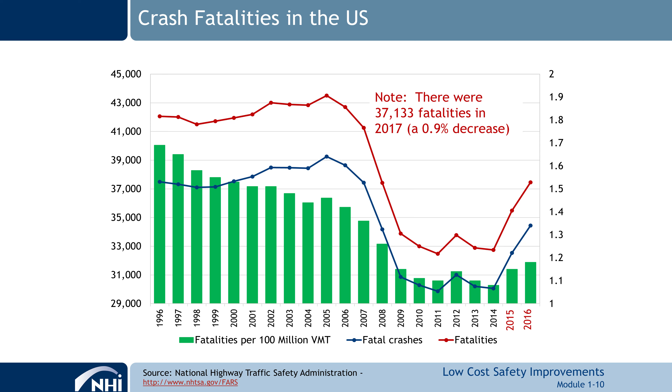This is fatalities. This is what we added, so you see it's in red here. So with the data, we just updated it. And remember, I can provide you these PDFs if you want. And you can see what's happened in the last couple of years. And here's what's happened in 2017. We're about doing this, right? Something along that. So positives? What do you see positive here?

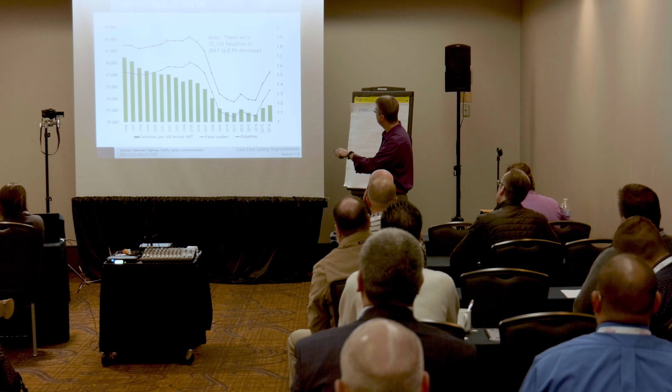Downward trend. I mean, this is all the way up to 2006 here. Our economy was doing well when that was all happening. And then what else? Again, I remember these times. Here's your rate. This is fatalities per 100 million VMT. So we had a 5 and 8% increase between 2014 and 2016, and about 1% last year.

Anybody here deal with crash data? And you're going to get my opinions. What happens with crash data? It goes up and down. It goes up and down, people. It always does. And so I look at this and go, man, yeah, we've been doing really well. And then it kind of leveled out and it popped a bit here. And now it's going up, but now maybe it's leveling off. We'll see. Maybe it goes back down the next year.

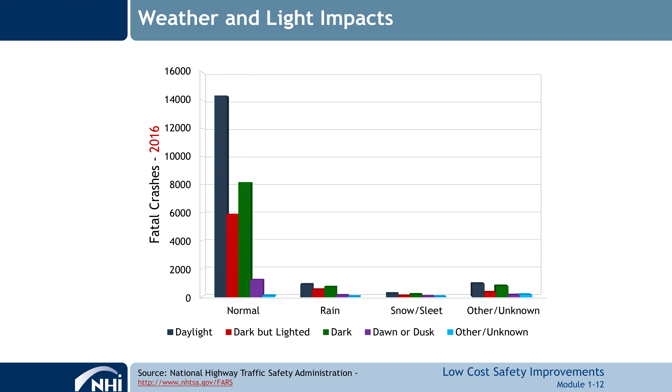All right, so moving on, we also have weather and light impacts. So you've got normal, rain, snow, and unknown, and then daylight. Does it surprise anybody that most of our crashes occur during normal weather conditions? What's the bias there? Why do we think those numbers are high? Speed? More normal days, higher speeds, more volume. If you look at dark but lighted and dark, lighting maybe has a bit of an impact there too, which is a good thing. We'll talk about lighting at unsignalized intersections.

So it's important to review data properly. We've got single vehicle, multi-vehicle, roadway, roadside. The blue here is on roadway, and you've got black and white, I apologize for that, but you've got on roadway here, multi-vehicle and single vehicle.

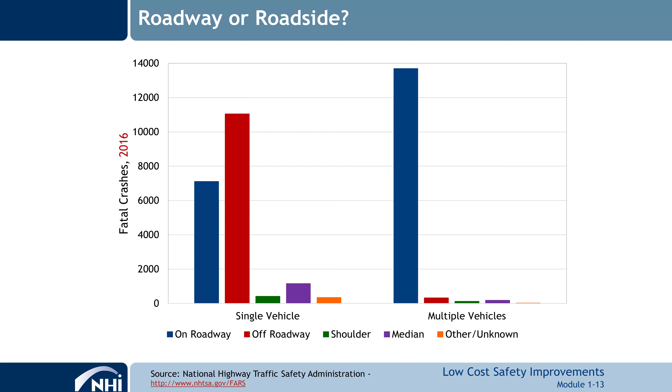So what's going on with single vehicle, on roadway and off roadway? Fatalities. How are people dying off roadway? Roadway departure. Hitting some kind of hazard or obstacle. Could be an embankment, could be any number of things. Tree's a big one. And what kind of crashes are we getting with multiple vehicles on roadway? Head on, crossing the center line. Single vehicles on the roadway, there can be some avoidance going on, so you've got lower numbers there.

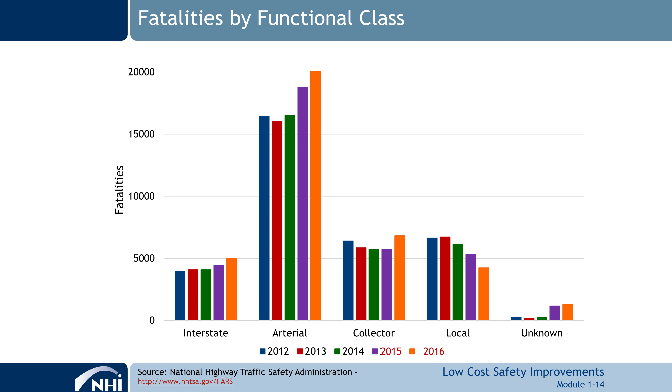This one's going to look different than your slide, because we put the years from left to right. You have right to left. This is by functional class. So interstate, by year from 2012 to 2016, arterial, collector, local, and we added unknown into our slide too.

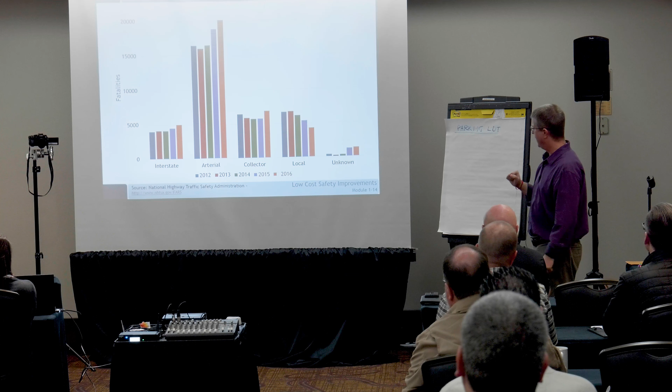Not surprisingly, again, in 2015, 2016, some of these have gone up. What I looked at, and if you look at your little chart, you realize they're all pretty straight across, right? So why has the interstate got low fatality? Got high speeds, not a lot of conflict points. There's fewer conflict points, higher speed, that kind of thing. Well designed, if that's how you consider a good design.

Arterials, why are we way up here for arterials? More conflicts, speed, design could be a bit different, right? And that's a big, remember, functional class covers lots of different types of roadways, right?

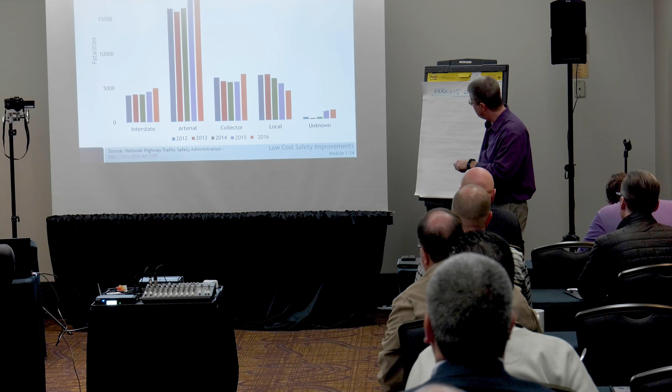What I was surprised by was this. So here's our local situation, right? Collector, local, and here, arterial. We got this jump up, which partially is due, no doubt, to the increase. But this went down, and then we had this unknown pop up. So I was going to say I investigated, but really I said, Nicole, go investigate this. What do you think might be happening there besides just the fact that crashes are up, because something's happening here.

Something's happening in the data. If you look at your chart, this is straight across, this is straight across, that's straight across. Something else is happening here, right? There's not these dramatic differences in data nationally typically, where they just go crazy like this. So what do we think? Any ideas? Distracted drivers on arterials are getting killed and local is lower speed, so they're not. Right, could be pushing the numbers up.

So here's really what happened, right? At least in my opinion, I can only give you my opinion. I had Nicole investigate whether there was a difference in how the data was being put in with regard to functional class. They changed the categories in 2014, and the data changed. Now what we need to do, of course, is look at this year and look across. In fact, probably take out 2015 because things were changing, and we need to look at the next 4 or 5 years and look for a pattern. Just because there's a pattern doesn't mean there's really a pattern.

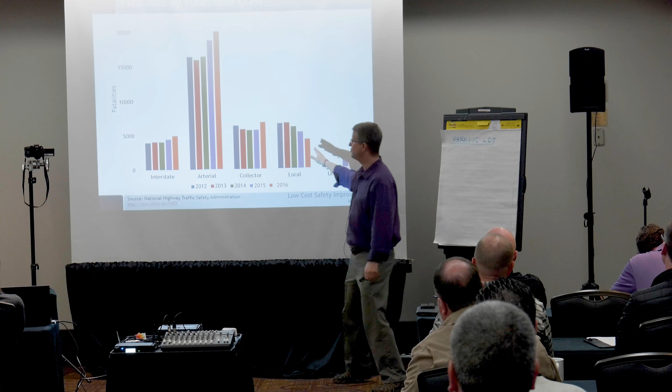When I see dramatic weirdness like this, I ask questions. And maybe that's the researcher in me, especially at the national level. Now, when you talk about rural and lower volume, things can really go up and down quite a bit. But to me, that's what's happening. So there is some volume, there are some other things happening here, no doubt. Fatalities have gone up. But there's also the fact that it's trading off here. This is just by functional class. That hasn't happened for years. So something was happening with the data.

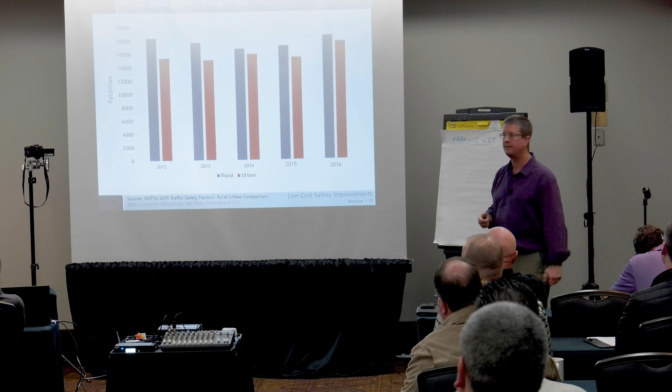Well, if you look at Minnesota, over the past 4 years, when you show the uptick in the 15 and 16 data, crashes and fatalities on trunk highways have increased. Crashes and fatalities on the local road system, because of our county road safety plans, have continued down. So we're down 25% since we started our county road safety plans in 2011. So they were following each other, now they have the uptick, but we're continuing to decrease. Right, I could believe that. That was a Minnesota slide. So that's another way of looking at this.

Again, by state, basically what he's saying is the pattern in his state is going in opposite directions. So some of this, even nationally, is going to be the impact of what we're doing with local road safety plans and everything else. Now, if you look at it in a state and you see that pattern and the trends are staying, it means they're trends, right? You want to look at trends. It was just interesting because then we flipped it so the years were in the proper direction. This is great stuff. I could spend lots of time talking about data.

The rural urban thing, I think we've all seen this, right? The blue on the left is rural. Red is urban. So it's a 50-50 fatality kind of situation, usually 45 to 55 nationally. You might say they're getting closer together. It's still within that 45 to 55 split, and it's getting closer, at least in the last couple of years, to 50-50 between urban and rural.

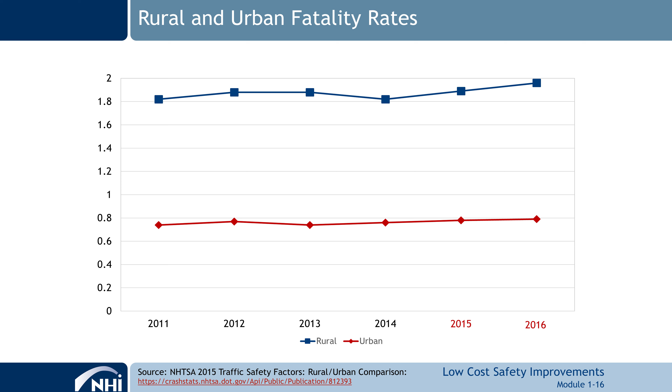Rates, again, I'm assuming a lot of you have seen this, but here's your urban, here's your rural. So we're at a 2.5 difference here in 2016. Those lines have stayed pretty much the same when it comes to rate. Why do we think the fatality rate in rural is higher? Volume's lower, yeah. Rate is by volume, so your volumes are lower. What else? Speeds are higher, so severity is higher, which means fatality.

There's more fatalities, right? And what else? We talked a bit about it. Different types of designs, all that, right? Signing. Again, I was in North Dakota talking about signing, even on gravel roads. I mean, I'm happy when I see a sign on a gravel road. Any questions on the data and where we are with data? We have work to do, yes?

Yes. So with regard to safety and your discussions in safety, I'm just going to click through these. Which of these do you use when you're talking about safety, to the layman or anybody else? Safer. Safer? Why do you say that? It's relative, yes? So do you ever look someone in the eye and say, this roadway is safe, and walk away? I've been in those public meetings and not said that.

So we'll talk a bit about nominal and substantive safety. That's very absolute, right? Can a roadway truly be safe? It depends on how you define it, right? If it's closed and no one's using it. Good point. Yep. You see where I'm going with this? So more safe, safer. We have to deal, again, I think there's a slide in this one or the next one about this, we deal with humans. Humans make mistakes.

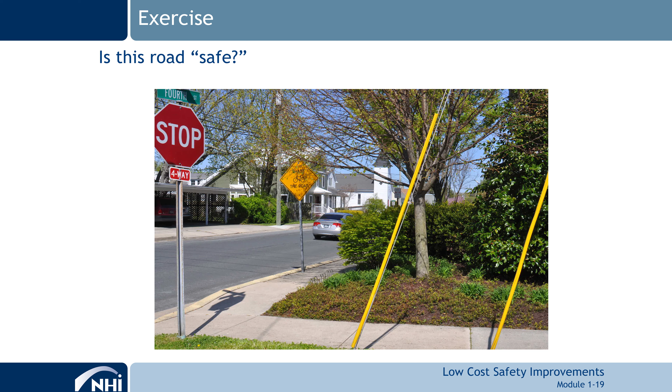Has some clear zone. Could be a clear zone thing? Clear distance. What are the factors we're thinking about? Well, you got the intersection sight distance too. Right, sight distance. Is it local? What's the speed? There's lots of other things we need, right? Or we think we need. It's not ADA compliant. Not ADA compliant, so there's ped issues there too. It's a four-way stop, and assuming there are signs on the other approaches, it appears to be pretty safe, but part of that's because it appears to be low speed. Sure. And you could have parking.

By the way, I have to bring this up because I teach MUTCD, the Manual on Uniform Traffic Control Devices. That four-way is a shall not, okay? You will use all-way. That's a shall. You switch those out when you need to. What if it's a five-way intersection? That's all-way. But what if not all approaches stop, only one? Well, then there's another sign they now have. Oh, for this instance, sorry. I'm getting into my MUTCD mode. So right, if there's another leg or something, there's all kinds of stuff we're not seeing. By the way, we have a few more here. Safe or unsafe, and why do you think?

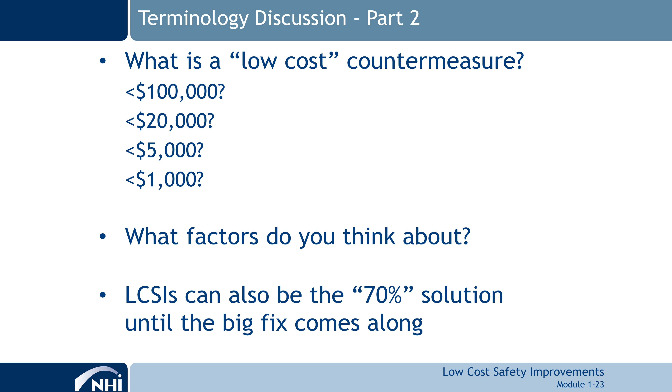Depends. What does it depend on? How many crashes you're preventing? If you're going to get into the benefit cost stuff, sure. What's that? Type of facility? Size of budget. Yeah. So again, the difference between a DOT and a local agency or city or a county, what low cost is, is different. And we're going to talk about a range of things. And some of them you go, roundabout is not low cost. And I'd say in some cases maybe it is. It just depends on your situation, okay? But we're not talking about blowing things out. So lots of different factors come into this.

And remember, again, someone mentioned this. It's just we're gonna do what we can until the big fix comes in. Problem is that big fix is often 20 and 30 years down the road, and that doesn't work very well. So we do what we can with what we've got. I think there's a session here, something about do what you can with where you are, one of the sessions in the next couple of days. Anybody want to mention a few? Well, we mentioned a few. Rumble strips, I mentioned the safety edge. What other low-cost safety improvements are out there?

Edge lines. What's that? High friction. That could be another discussion. I don't think it comes up. We did a webinar a month or 6 weeks ago on high friction. It's recorded and on our website. Intersection lighting. Yeah, there we go. I was going to say, when's someone going to bring up signing? Signing and marking. Sure. This is a safety edge thing, yeah.

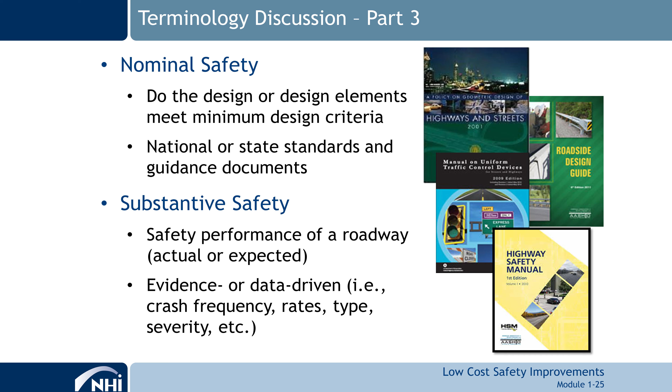We're going to be talking about crash reduction factors and crash modification factors. So a lot of this stuff, we're learning more and more, which is the Highway Safety Manual. That came out in 2010, and we'll make a point of saying whether something's in the Highway Safety Manual or not. It's going to be updated in another couple of years. A lot of this stuff was not necessarily based on safety and safety knowledge.

It was based on best practices, okay? So that blew me out of the water. I've been following the Green Book and the guides and all that for years, and if someone were to say to me, and this was years ago, right? We now know this. What's the difference in the expected crash impacts of a 10-foot lane versus a 12-foot lane? It's in the Highway Safety Manual. We know that now. Before that, we didn't, right?

Is there a big difference between an 11 and 12-foot lane with regard to safety on two-lane rural highways? No. 10 and 12? Bit more. 9 and 12, a lot. Yeah. If anybody's driven on an 18-foot roadway lately, and I did one in Iowa just recently, it's a little sketchy. But so we now know those impacts. The point is, I bring up lane width just as an example. There's a lot of stuff out there that still isn't based on, it's based on best practices.

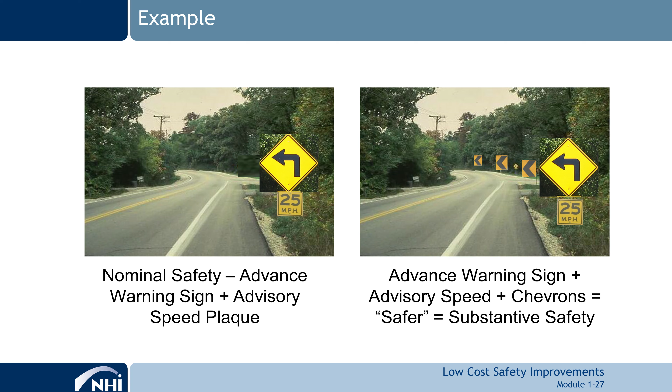And what we're doing with the Highway Safety Manual is we're learning more about that line, right? With all the different factors, crash reduction factors, crash modification factors. Does that make sense? Again, as a guy that taught and did geometric design, arterial design for years, when this happened, this just blew me out of the water.

So you have situations like this. It's probably not a good example if you know the MUTCD. You have this curve, and you've got this advisory speed and a turn sign, and that meets MUTCD. Let's just say that it meets it. If you know a lot about MUTCD, you realize maybe it doesn't. Then you decide to add chevrons on because there's still people running off that curve, and you've improved the safety on the curve by adding something in addition to what you had to have. Okay? And that's the kind of stuff we're going to be talking about.

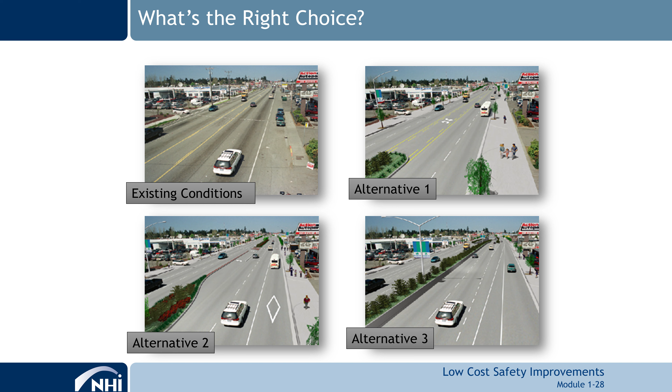If you looked at this situation, so there's a roadway out there, it's a 5-lane roadway, and if you had to make a decision, which one would you pick from a safety point of view? Is it obvious or not? Should we take a vote? I got a number 3 here. Turn lane, bus lane. This is existing, 5-lane with parking. Depending on your needs, 3 is probably the best alternate. 2 is not bad. Right. It depends on your needs, depends on your budget, all kinds of things.

Certainly if you close this entire median, what kind of discussions are you going to have? Businesses and economic development comes in as a factor, right? And that trade-off. And some of you probably had that discussion between economic development and safety. It's a hard discussion to have. So hopefully we've kind of gone through all this together and you understand this.

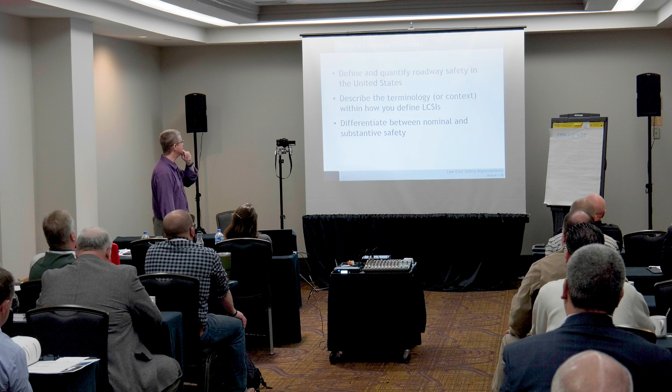So how many times higher is the fatality rate in rural areas than urban areas? 3. 2 to 3, yeah. Well, actually, I have 2 times. It's really 2.5 at this point, right? Which one would you pick? Safer, more safe, or safe? Safer, more safe, yep. I think there's one more. What type of safety is met when all required design criteria are met? We just talked about it. Nominal, yeah. Okay, good.